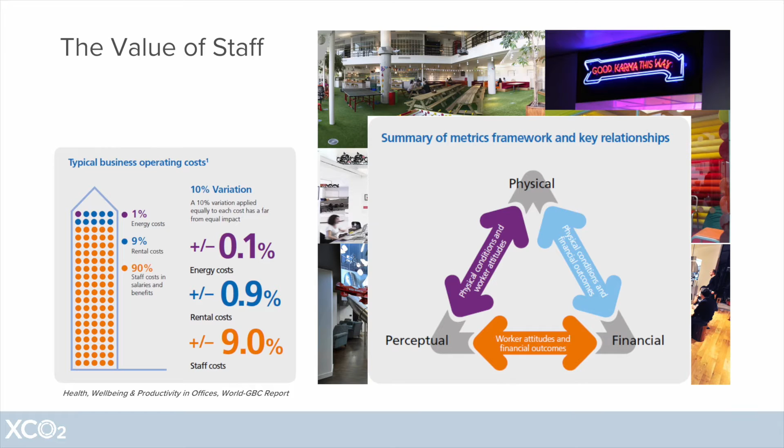Staff are key on this. You've seen that graphic before. It's a great one, and I think it's one that's probably been responsible for a lot of the changes that we're starting to see because people suddenly realise how important their staff are. In some cases, this translates into slightly gimmicky approaches to try and bring people in. But a lot of it is translating into the idea of what's the office environment? What is the experience we have within our built environment?

We spend 90% of our lives indoors. Most of it is in our home and in our office. The home is completely in our control. We can do what we want with it. Our office space, less so. So how do we make those environments more enticing for people?

From a design perspective, you always have this trade-off between what can you actually put in the space, how do people perceive the value of that, the impact on them, what does that mean in terms of my comfort, my productivity, my feeling being here, and what's the cost, which is always the question the client comes back to. Conventionally, you might think about this in terms of HVAC design.

We're looking at a ventilation strategy maybe, and we're trying to decide, are we going to have manually opening windows where the people will get up and they'll open the window if it's too stuffy or if it's too warm? Or do we want automatic controls and actuators so they'll open at the right time to ensure that the environment is always comfortable? You've got two different physical solutions.

There's very different perceptions from the occupants, and actually the level of control and their perception of that level of control is quite key to comfort and how that's viewed, more so than the actual temperature in the space necessarily or the air movement. And the two solutions have very different costs, and there's different management requirements. So what does that mean for the developer or the client in that space?

These kind of discussions and the trade-off between these three principles is starting to extend beyond quite tangible things like that and more into aesthetics and into the mind and into the behaviour and how that reflects on the environment we're creating. So what's been the response in terms of health and well-being? Well, the latest version of BREEAM has a pretty comprehensive 22 credits. This is stuff we're all familiar with and we all think about on a day-to-day basis when we're doing these kind of jobs. It's air quality, it's comfort, it's acoustics.

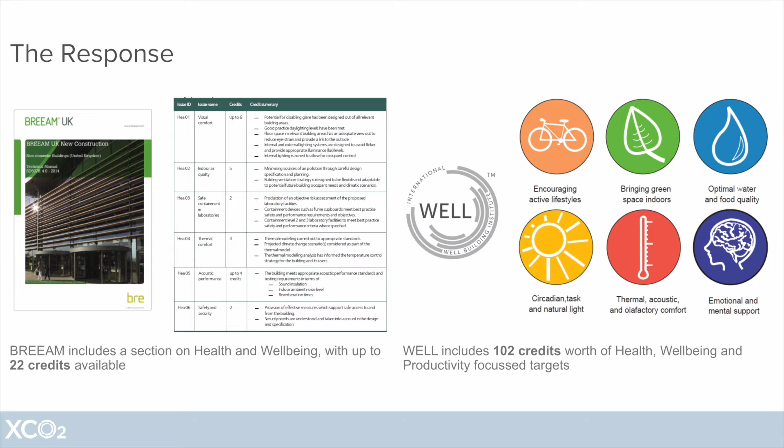But then when you compare that to WELL, which has 102 credits, you can see there's quite a step change here. Now, as Julie mentioned, there's a lot of overlap with what BREEAM does, and as Anne-Marie mentioned, there's a huge overlap with LEED as well, for those that are familiar with that. But there's also a lot of new stuff here. And I know from going out and talking to our clients and our collaborators, trying to explain what some of these principles mean, why it's important to design teams is quite a challenge.

And what I would say is that what sits behind the WELL standard is a huge amount of information and research and work that's been done by Delos over the previous 8 years. There's a whole load of what are called wellologies, which take each of the topics and expand on the science behind it. And if you look into some of these, there are some amazing statistics and graphs and data and research that shows you how much the change in CO2 parts per million in an office space would affect people's rational thinking, their ability to make decisions, their productivity in the afternoon.

If you start putting data like this in front of clients that are trying to build highly productive offices or very creative work environments, they suddenly start to see the value of all of these elements. So there's a lot of thinking about not just what the standard wants, but what that actually means to the end user, to the people running the building, and to the companies that are going into them.

So talking a little bit about the idea of certification on this and what it means from a design and in particular from a simulation perspective. The first step has always been for us to kind of look at the RIBA approach, look at our concept design, develop that through, get it built, get it tendered, etc., all the way to the point where we hand it over and then we walk off and we go do something else.

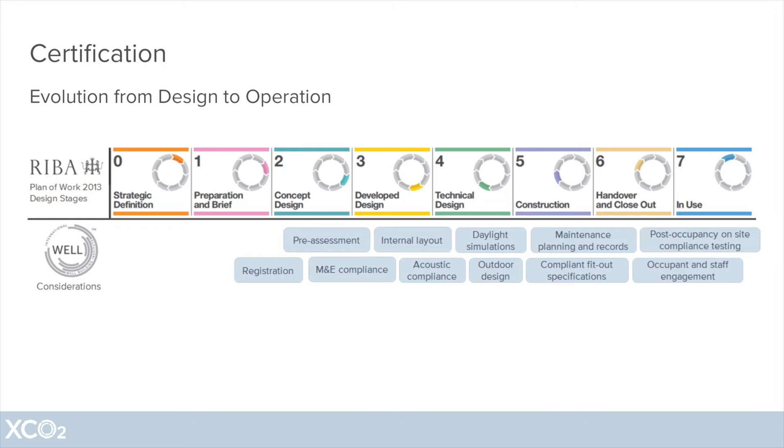With WELL, there is a much greater focus early on, and you have to incorporate the core concepts right at the start of the design process. The registration, the pre-assessment are quite critical to understand the form, the internal layout, position of cores and things like that. And for us as designers, we need to be guiding the rest of the team on that. But for us as simulation engineers, we need to be thinking about some of these ideas right at the earliest days. So whilst Julie mentioned that roughly half the credits relate to M&E, there's a similar proportion, albeit not exactly the same credits, that relate to simulation.

And while most of the certification is based on sort of in situ testing or documentation, there's a lot of stuff early on that we can influence and we can demonstrate the impact of the design on whether the credits can be achieved or not. So this means we start to look at the importance of daylight, of acoustics, of ventilation strategies, that sort of stuff, really, really early on. And we continue to evolve and iterate this throughout the design process.

And in particular, continuing to engage with the staff afterwards. So that the analysis we've done on day one and the influence that has had all the way through the design and construction process actually delivers a better performance in the building, because it's that performance at the end that's going to get tested. That's what's going to get you the certification, not the simulation you did really early on or the design documentation that goes behind it.

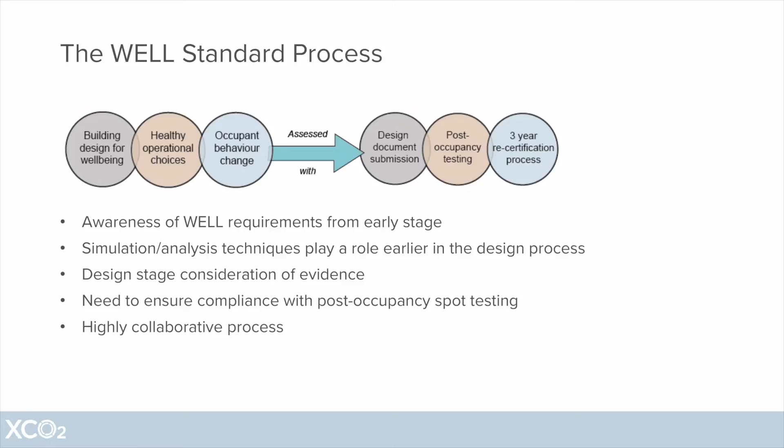So in terms of the process, there's very much a focus on the quality of design, enabling a healthy operation, and promoting behaviour change with the occupants. The three elements that we've talked about before in terms of documentation submission, post-occupancy testing, and the recertification process, it's arguable that none of these aspects require any kind of simulation as part of the evidence. But all of them need to be thought about early on.

And as a result, simulation analysis plays a really significant role much earlier in the design process, I think, than we are used to. We should be looking at how air moves through the building, how the lighting is behaving and what the comfort is at RIBA Stage 2, RIBA Stage 3 when we're developing our concepts and our layouts, rather than trying to do it at Stage 3, Stage 4 as part of a building regulations sign-off or a BREEAM design stage submission, for example.

So we sort of talk about the idea of having a lot of consideration of what needs to happen in the building at design stage, assessing the impacts of that and trying to map that through into an equivalency in operation. And ensuring compliance with the post-occupancy testing is quite challenging. So thinking about how we can model that. If we need to achieve certain air quality metrics when the building's in operation, what are the factors that might influence that from when we complete the building and hand over to the point where people are in it and using it? Things like sensitivity and parametric analysis start to become quite key because we don't know for certain exactly how many people are going to be in that space.

If the client says it's 1 per 10, and then a tenant moves in and decides it's going to be 1 for every 6 square metres, what does that do to your design? What does that do to the levels of CO2 in the space? There's going to be more furniture and equipment. What does that do to the VOCs? How do these little changes in terms of layout and space usage impact on things? And what can we do from an analysis perspective to ensure that we're not compromising the certification at the end?

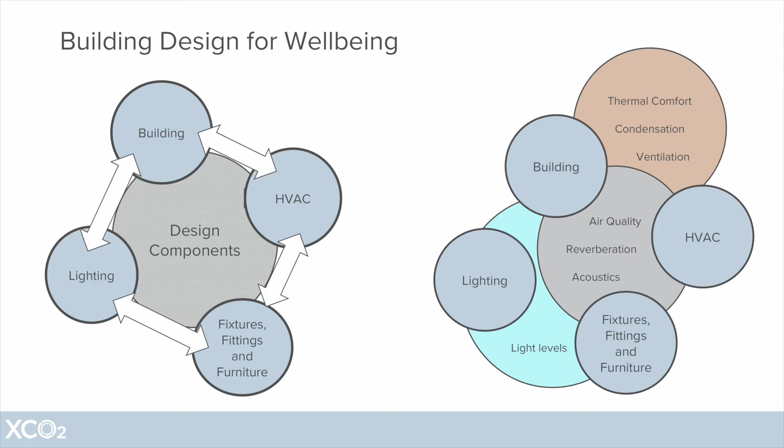9 times out of 10, we don't even think about fixtures, fittings and furniture. That's somebody else's problem. And lighting will get dropped in. Sometimes it will be ambient, sometimes it will be task, a combination of the two. There's probably an architectural requirement in terms of how the fittings are going to look and how they work.

That kind of siloed approach isn't going to work for WELL, and it's not the sort of thing we need to be doing if we want to have healthy and productive buildings. We need to be thinking about the experience in the space. Air quality is a function of the building, the systems, and the fixtures, fittings and furniture. So we need to consider all three of those really early on because it's quite a fundamental precondition for WELL, and you're not going to get it if you're not considering all these ideas.

Similarly with things around thermal comfort, around lighting levels. We've all worked on jobs where it's been core and shell, and you've got an idea of how the office is going to be laid out and you've modelled on that basis. And then a tenant comes in and they partition it in a completely different manner, which means that the ventilation system's not working because you've got supply in one zone, extract in another, and the two don't connect.

Or you've got lighting and you've got a partition wall right down the middle that cuts through it. We need to move away from that kind of isolated approach and try and think about the whole process and the experience.

So this is kind of our starter for 10 on what we think can be simulated, and builds a little bit on what Julie was talking about, I think, in terms of the key concepts from WELL and the opportunities for these. Now, some of this I think we can do currently, both within the virtual environment or with other tools as well. And a lot of this I think is stuff that we don't really do either.

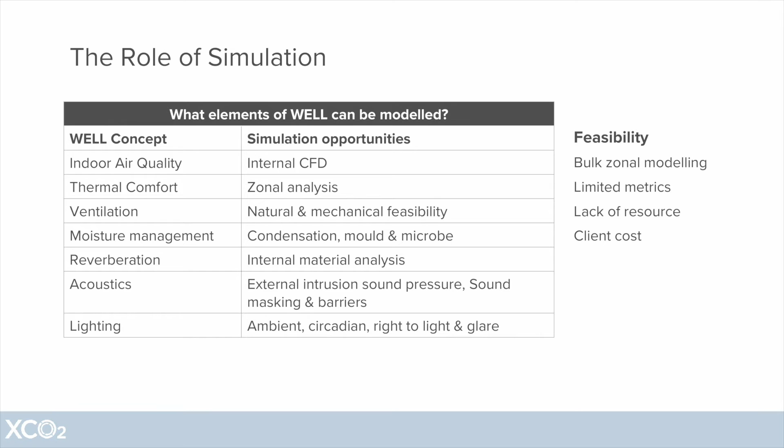It's about looking at 2 or 3 simulations for each area to say, well, this is what's likely to happen, but if you have a few more people, or if it's a slightly different environmental condition, then this is the sensitivity of it, this is the significance of the change.

And that's the sort of stuff that we're not really doing at the moment, but it's a big area of opportunity. And actually, it's the sort of thing that can put us, as building simulation engineers, right in the middle of the design process as the key pivot for what's going on. What we need to do is show the value to our clients in terms of the product they get at the end of the day and the service that we give to them.

So I thought I'd take you through a couple of examples. These are projects we've done recently that have a very traditional approach, and then for one reason or another have become more of a WELL style of approach. So the first of these is a coffee shop. Very simple, kind of quite standard coffee shop. You've got a big seating area, there's a counter, and there's a back of house.

Conventional design approach was based on load sizing. So we look at how many people are in the space, how much lighting, how much solar gain, et cetera. Worked out that they needed 3 fan coils in the ceiling. And they were located in a fairly arbitrary manner. And there was ventilation provision based on the number of occupants. And that was about it. It's pretty standard, roll it out. There's 100 sites like this built every year. So the design team churn it out quite rapidly, pretty standard approach.

Sometimes all of the sites will obviously have Part L. There'll be an SBEM calc that goes with it. That'll split it into 2 or 3 zones. Sometimes there's a BREEAM requirement from the local authority because you're building in an area and they want a BREEAM assessment. Quite often that's fit out based. There might be a bit of an assessment about, well, how many hours over 28 degrees are you meeting thermal comfort, et cetera. When you've got big AC units in, chances are you'll meet that, and actually there isn't much more to it.

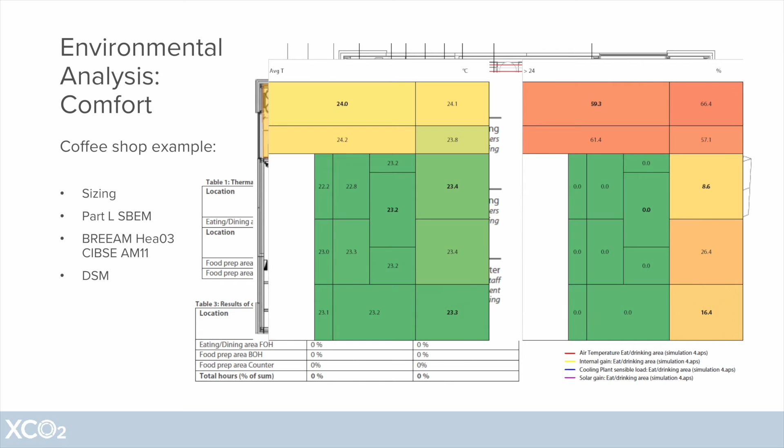Now, there were a couple of exceptions to this. You'd got a very heavily glazed south-facing facade, which is why on the right-hand figure there's a few areas that get above 24 for a reasonable part of the year. This is for the peak day, actually, not the full year, but anyway. But what we found was there were a couple of key things. One was about the location of the fan coils.

They were dotted throughout the seating area rather than being specifically located to the facade that was going to get a lot of solar gain, the counter space. The controller was on the wall to turn it on and off, and that was programmed with set points and hours of operation, which seems pretty logical.

The temperature sensor was mounted to the bottom of the fan coil unit, which meant that if that zone was comfortable at 24, the fan coil unit would turn off, regardless of what was actually happening in the occupied zone beneath it, or the zone adjacent where all the staff were working behind the counter. And that one fan coil unit there was controlling the other two next to it as well.

So there were a few recommendations around relocating the units, moving the sensors to the occupied spaces, having a sensor for each fan coil. And a lot of this, when you look at it, seems quite common sense. But it's the kind of stuff that we never really think about when we're designing a building, because we'll say the peak gain is 25 kilowatts and we've got 30 kilowatts of cooling. That'll be fine to keep it comfortable.

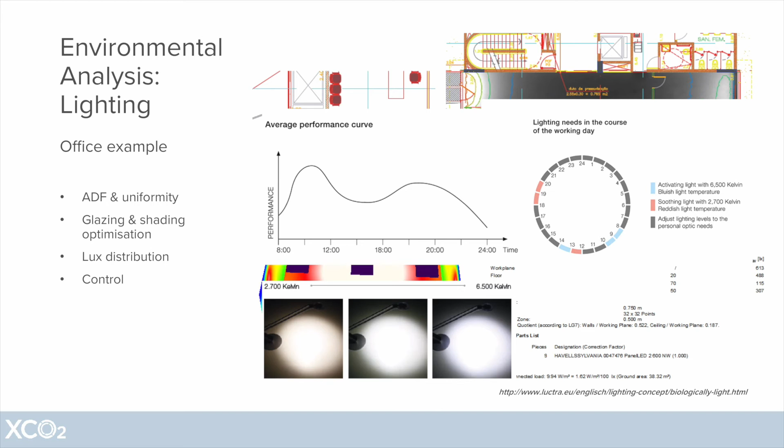You can download apps for your phone or your tablet or your computer that will change the colour temperature on that. So we looked at how we can shift the colour temperature on individual lighting within the space, targeting changes that will occur throughout the day that could be fine-tuned for the individuals. You can have an app on your phone that controls your desk light, and you can say, I'm going to be in the office at 8 in the morning, I want to take lunch at 2, and I'm going home at 5. And it will shift that curve for you, and vary the light throughout the day to align with the way you want to work.

Your colleague next to you can have a completely different profile for their task lighting and their computer. And this highlights the importance of not just thinking about the balance between natural and artificial light, but bringing this home into the individual space and the individual experience of the users. There is potentially a trade-off with energy, in that the lighting becomes a little more intensive and more focused. But if you're shifting from ambient to task focus, you're getting a balance with the daylight as well, and you're varying the colour temperature. I think you're probably going to find that you're on a par with most other solutions.

Finally, to talk a little bit about air quality. I highlighted early on this is the biggest issue for me personally, and I think we found as a company as well, it's one of the biggest challenges with the WELL standard and with doing anything in London in particular. This is a recent restaurant project where we were trying to understand whether we could get a naturally focused strategy to try and be energy efficient and as passive as we can. So we looked at the air movement within the space.

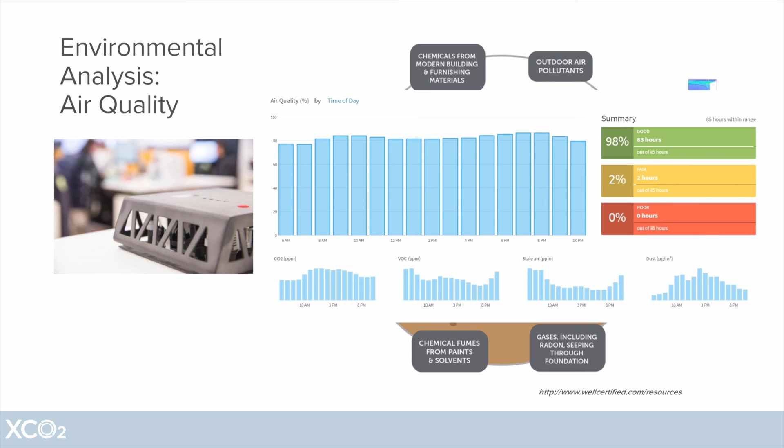But the big problem with all of this is it didn't really get into the detail of the quality of the air. Now when you look in WELL, and this is one of the graphics from the WELL ontologies I mentioned earlier, these are the things that all get factored in somewhere within the air aspect in WELL. So things like mold and bacteria, things like combustion fumes, carbon monoxide, cigarette smoke, none of that gets picked up in our conventional modelling.

And actually, how we model that within a simulation is a really interesting question, because a lot of that is influenced by external factors that we probably don't know. It's very site or project specific. There's a lot of influence from things like furniture, fixtures, fittings, even people themselves. And all of that we don't really know at the design stage.

So on a couple of projects recently we've started to look at monitoring as an alternative to simulation and trying to partner that up. And actually monitoring the current conditions in people's buildings, whether it's offices, restaurants, homes, to see what's going on in the space and what's actually happening, and comparing the observations from monitoring back to the requirements from the standards. What's really interesting is VOCs; we saw some really odd behaviour in a typical office.

You get a build-up of VOCs to a saturated level overnight and over the weekend based on off-gassing from the furniture and the fixtures, fittings and everything else. When the staff come in in the morning, they open the windows, the level drops because the external level is much lower than the internal. But even with the window opening and quite a nice sort of passive strategy through the summer months, the levels we were finding in a typical office were an order of magnitude higher than the target levels that come from the WELL standard.

So this really highlights the importance of thinking about your preconditions really early on, understanding what the levels mean and what that might require. And the fact that actually if you've got a natural ventilation strategy like this, switching to a mechanical ventilation with good levels of filtration might be a better way to go.

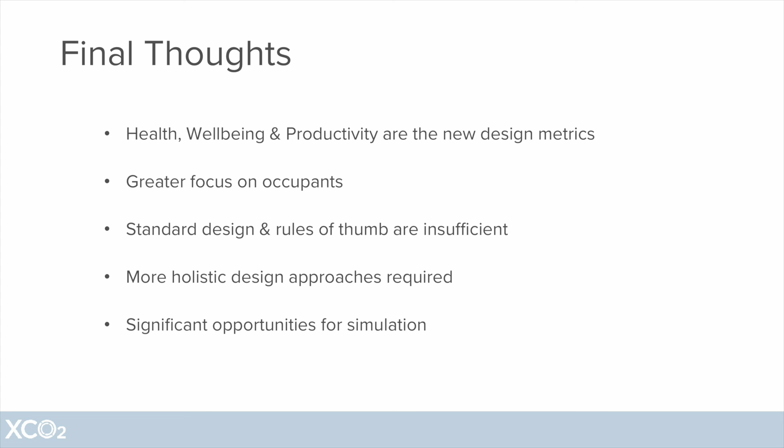Final thoughts from me. Health, wellbeing, productivity are very much the new design metrics. This has got to become our new language, and translating this into something the clients can understand, that building occupants can understand, and also that our colleagues on the design team can understand. What does it mean for the architecture? What does it mean for the building services? And how does simulation support that?

Very much a greater focus on occupants, and this is something that we really should be designing for, but quite often we don't know who the occupants are going to be. If you're looking at things like WELL and health and productivity, you can't not know who your occupants are because they're quite key. Standard design, rules of thumb, the way we do things at the moment really aren't sufficient for what we need to do. And I think we need to have a much more holistic design approach throughout the process and be involved from the very first stage right to the very end. And all of this means that there are really significant opportunities for simulation here to get involved.